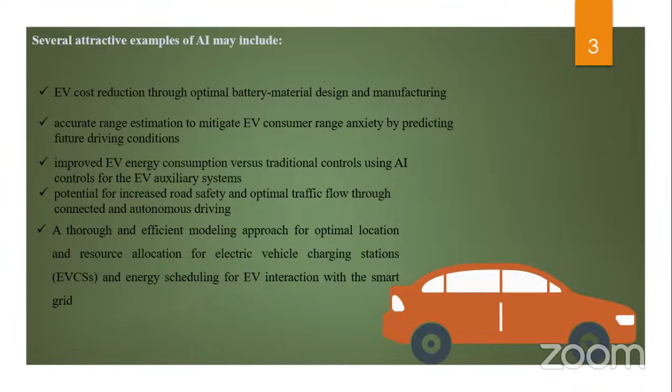Similarly, a thorough and efficient modeling approach for optimal locations of electric vehicle charging stations. These are the limited areas where artificial intelligence has a great contribution: electric vehicle battery design, manufacture, management, range optimization, and EV control system design and optimization.

Now it is not possible that we can skip charging stations when we talk about electric vehicles. It becomes very important to discuss charging station infrastructure, because it is like milk for babies. One cannot survive, one cannot imagine that a baby could survive without feeding milk. Similarly, this electric vehicle industry could never boom unless we have proper infrastructure for charging stations.

So there are several factors related to charging station establishment, like local charging demand, road connectivity and other infrastructures. Other infrastructures could be supply of electricity to that area, construction feasibility - how much the construction is feasible - operating economy, and power grid security.

Being very specific, for optimal location placement, with the help of data analytics including the use of machine learning, better electric vehicle infrastructure could be planned. Secondly, through data collection and data pre-processing, the efficiency of existing electric charging stations could be improved.

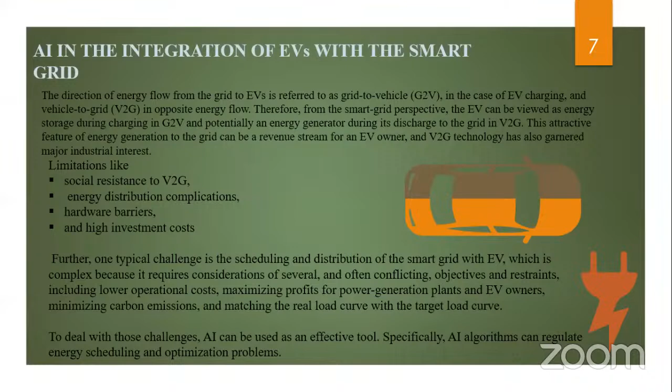But at the same time, there are limitations like social resistance to V2G, energy distribution complications, hardware barriers, and high investment costs. In a nutshell, artificial intelligence can be used as an effective tool, especially AI algorithms that can regulate energy scheduling and optimization problems.

Another trend is the use of artificial intelligence in autonomous driving, that is self-driving cars. AI-based systems give a very convenient driving experience and are also safer, because AI-based vehicles have sensors with the capacity to detect things at the back, front, left, and right of the car, which sometimes becomes impossible for a human driver, resulting in certain road accidents. So these are some research trends available in this industry.

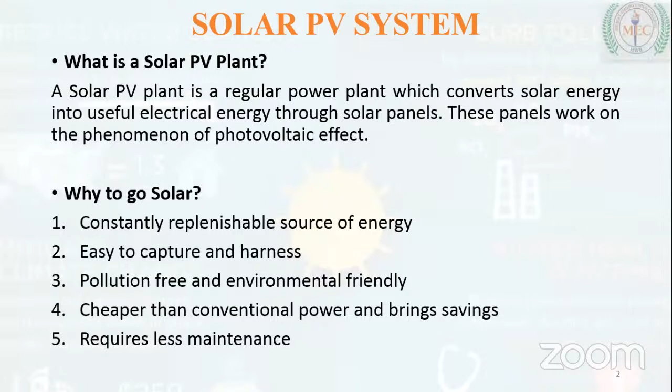Because this source of energy is constantly replenishable, and we can easily capture it. It is also pollution free and maybe the cheapest power that is available today.

Now the electricity that is converted from the solar plant is actually DC power, so we need to convert it to AC by using an inverter. Once the inverter is used, the power gets converted.

So this is a brief scenario of the solar PV plant in India. Currently, India is the third largest nation in terms of consuming electricity, after China and the United States. As the central government has set an ambitious target to achieve net zero by 2070, I believe renewables will play the most important role. The country is continuously targeting to achieve 450 gigawatts of installed renewable capacity, out of which 280 gigawatts is to come from solar.

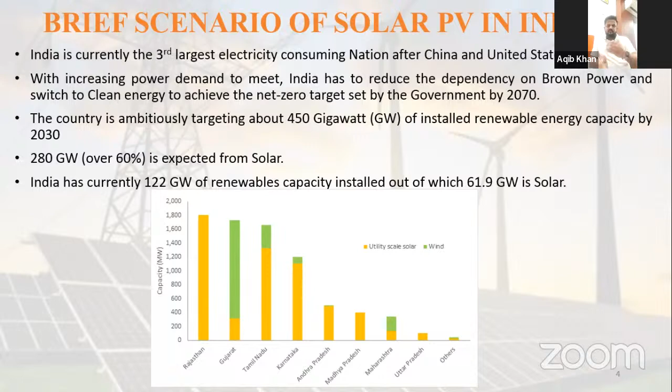So this is a brief overview of what a solar plant comprises of. Basically, a solar plant is not a single component; it is an integration of several components that work together in synchronization to harness the sun's energy. A typical solar system consists of solar panels, mounting structures, solar inverters, battery and charge controller in case of an off-grid system, and a metering panel. The metering panel comes into picture where we install solar in industries, along with cables, accessories, sensors, and a monitoring system.

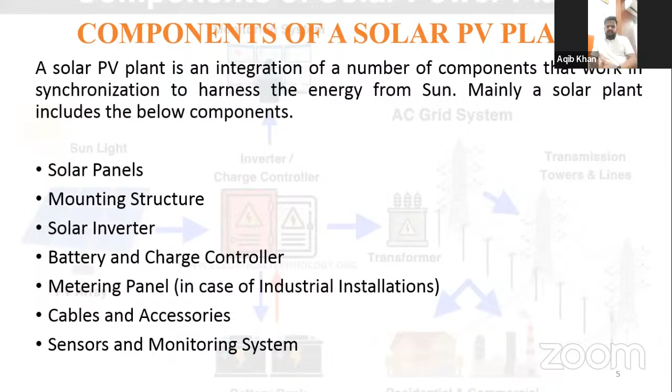This is an overview of the typical characteristics of a solar cell, or solar panel. From this graph we can observe a few important characteristics, which are the operational conditions for solar panels and solar cells. The open circuit voltage can be depicted from there - it is the maximum voltage when there is no load. Short circuit current is the maximum current that can be obtained. Maximum power point, Pmax, can also be obtained from this graph, as can the fill factor and the conversion efficiency. These four points are called the electrical characteristics of a solar panel.

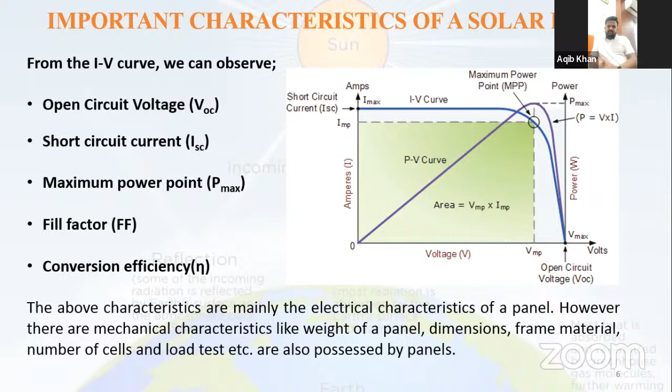Apart from the electrical characteristics, a solar panel or solar cell also consists of mechanical characteristics, like the weight of the panel, dimensions of the panel, and what sort of material is used to harness the cells in the panel. We also did a study of the performance evaluation because it is important to know how the plant is performing.

So there are several factors which are involved in the performance evaluation of a solar plant.

The factors for evaluation include the orientation of the module - meaning at which angle we are placing the solar panel - and the latitude of the location where the plant is installed. Temperature of the cell is another factor. If there are shadow-casting objects nearby, it may block the sun's radiation and affect the generation of the plant. Efficiency of the solar plant is another factor. Solar irradiance is the power density coming from the sun per unit area of the panel. Climatic conditions like clouds, wind, and rain can also affect performance evaluation, along with operation and maintenance, and lastly, the workmanship and installation practice - how you install the plant also impacts the generation.

This is typical data from a plant installed somewhere in Rajasthan. We analyzed the plant for a period of almost two weeks and found this data - the generation we got on 25th January, 26th January, and so on - plotted against the performance ratio. Performance ratio is a very important factor that plays a key role in determining the quality of a solar plant, and you can see the performance ratio is also measured here.

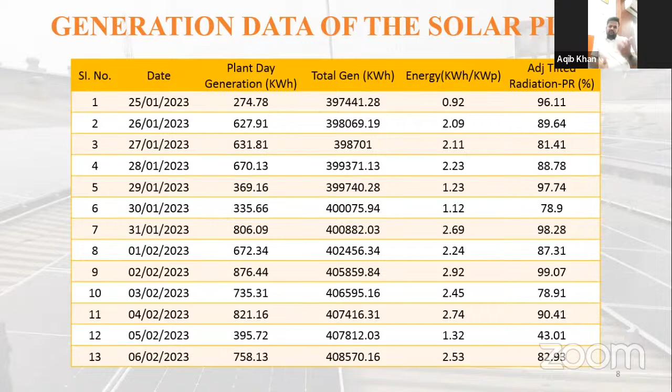All this data is actually measured through a SCADA system - supervisory control and data acquisition system. Wherever solar is installed, a SCADA system is installed so you can monitor the plant data and generation data.

This is the conclusion: this world is facing climate change, and renewable energy is the best alternative, though at the cost of a very high upfront investment. Whenever you need to install solar, you may need to bear a heavy investment. The storage system, battery backup systems, are also quite expensive. A major drawback is that solar panels do not work at night, because once the sun sets, the solar will stop working.

Solar panels cannot be installed on every type of roof. That is another drawback of the system. Additional area is required because solar cannot be installed everywhere. It must be a shadow-free area where you need to install solar.

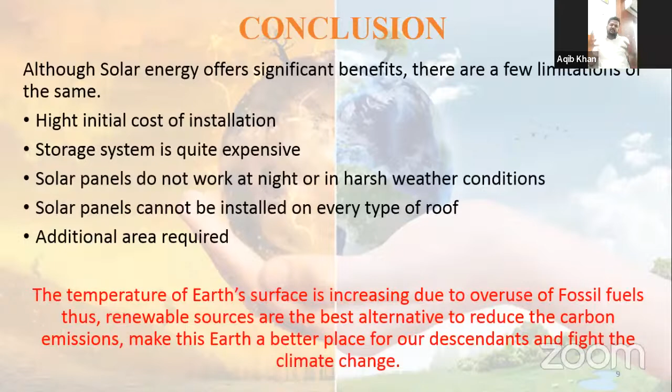The temperature of Earth is constantly rising because of the overuse of fossil fuels, coal and petroleum, so we need to shift our power dependency from brown power to green power. Together we can make this Earth a better place to live, and we can fight climate change. These are the references of a few papers cited during the study. This brings me to the end of the presentation. I would like to invite...

Hello, can you hear my voice? Are you able to hear me? Yes sir, very much audible.

Try to include some data also, some comparison type of data, that would make the paper and presentation more effective. If you have comparison type of data, for example in one year in one city, the automobiles running on diesel or petrol were causing so much pollution. And if electric vehicles are there, then that would show the amount of reduction in carbon footprint. Something like that, if you can include, that would make the presentation more effective. Absolutely sir, thank you for the suggestion.

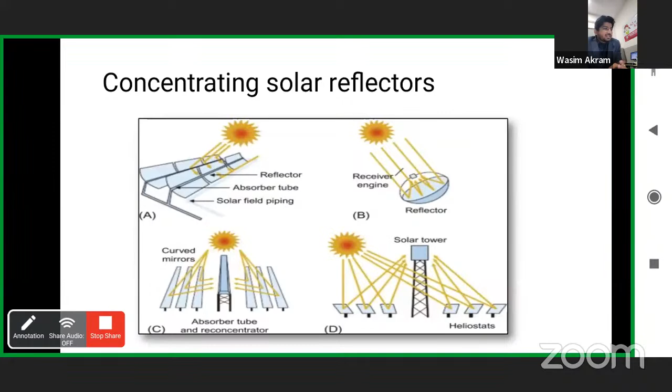The concentrators are typically the most expensive subsystem in a CSP system. Concentrator systems present an alternative target for cost reduction. Additionally, reflector costs make up roughly half of the concentrator's cost, so lowering mirror costs is an ongoing area of research.

Reflectors that are less costly, improved in optical performance, more durable, and have lower maintenance and cleaning requirements are highly desirable and represent key areas of research. A concentrator can be characterized by its concentration ratio and concentrator efficiency.

As far as reflectors are concerned, concentrator efficiency refers to the ratio of sunlight that reaches the receiver divided by the sunlight incident on the concentrator. Real systems have concentrator efficiency values that drop below unity due to imperfect reflector materials and challenges associated with varying solar elevations. The optical properties of the reflectors and the design of the concentrator are both important in achieving high concentration efficiency.

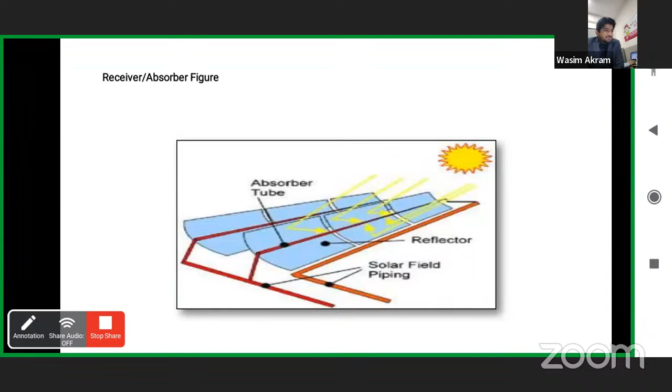I would go to the point of power generation. The generation of electrical power is one of the most important applications of an energy source.

Solar thermal power cycles can be classified as low, medium, and high temperature cycles. Low temperature cycles work at maximum temperatures of about 100 degrees Celsius, medium works at around 400, and high cycles work at a temperature of around 600 degrees Celsius.

Solar energy is one of the valuable sources of renewable energy, and there are different ways to harness it. Low temperature systems use flat plate collectors or solar ponds to collect solar energy, while systems that utilize the solar chimney concept have also been proposed.

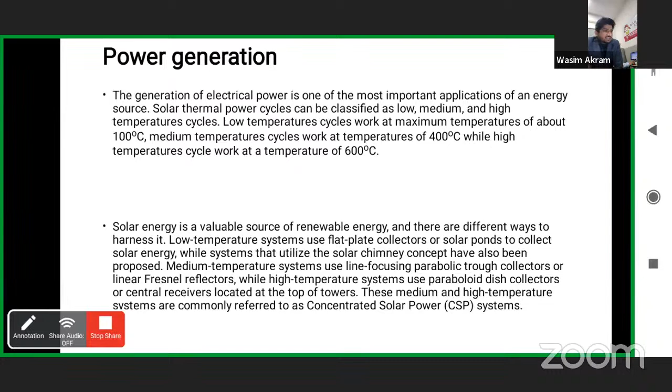Medium temperature systems use line focusing parabolic trough collectors or linear Fresnel reflectors, while high temperature systems use paraboloid dish collectors or central receivers located at the top of the tower. These medium and high temperature systems are commonly referred to as concentrated solar power systems.

As far as the conclusion is concerned, I would like to go to that point. Concentrated solar power stands out as one of the very unique forms of renewable energy, thanks to its ability to store thermal energy. This allows it to produce electricity on demand, acting as a reliable and consistent source of power similar to traditional baseload power plants.

Additionally, the integration of CSP with thermal energy storage allows for greater utilization of other variable or intermittent renewable energy sources such as wind and solar power collectors. It can also work in conjunction with fossil fuels in hybrid configurations, improving the overall performance of both systems.

Researchers and scientists have spent over a decade exploring ways to harness the vast energy potential of the sun, and the CSP industry continues to innovate and improve its grid compatibility, use in hybrid systems, and integration with...

As far as this is concerned, it increases the efficiency, because we all know that solar energy is almost provided free of cost. So it is one of the very promising technologies, and the future

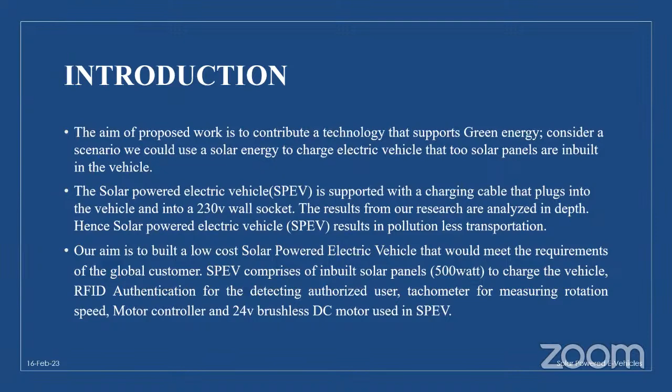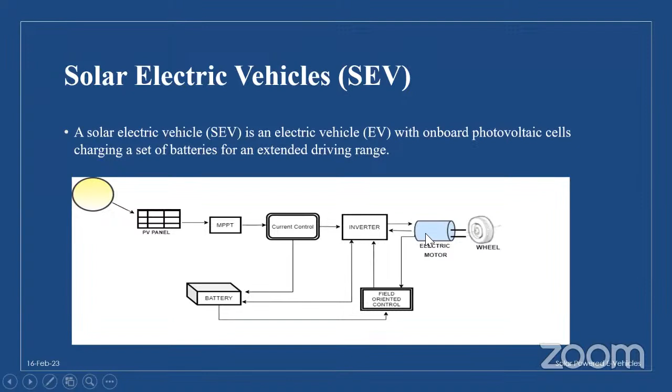A solar power electric vehicle is supported with a charging cable that plugs into the vehicle and into the 230-volt wall socket. My research topic is about a solar electric vehicle, which is a very pollution-less transportation system. This is my solar electric vehicle figure. This is the PV panel and MPPT, which is maximum power point tracking, current control, and inverter. This is the electric motor, and we are also using a battery. I'm not going to talk about the theory of the solar electric vehicle; I'm talking about all my calculations in my research paper. My calculation is about the solar electric vehicle. I have only taken the assumption of data like mass and speed of the electric vehicle. Mass of the vehicle is 130 kg, speed is 40 km/h, the slope is 0.1, and diameter is 0.58. Battery weight is approximately 30 kg, average speed is about 35 km/h, and the range is 50 km.

Calculation about the angular velocity of the wheel, I have shown in the figure also. And this is the calculation about linear velocity, 40 km/h, and the speed I have taken is 40 km/h, which in meters per second is 5 upon 18. Diameter of the wheel is 0.58 meter, and the radius is 0.29. And the angular velocity, using linear velocity equals angular velocity into radius, this is the calculation about angular velocity, and the relation about angular speed also.

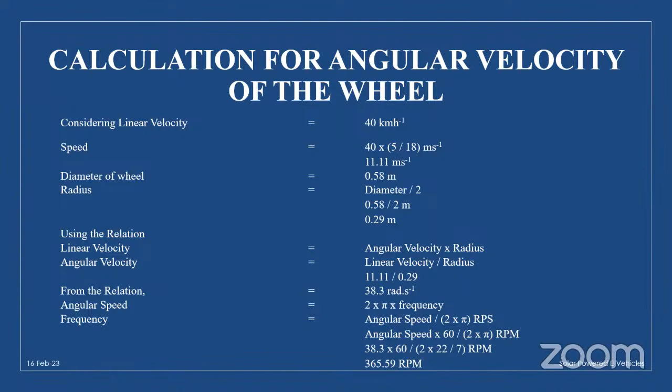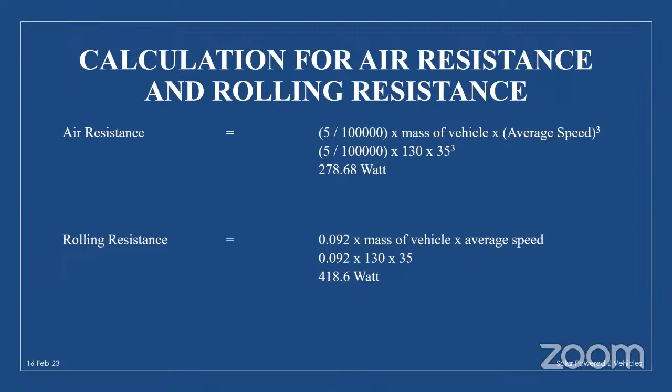So the power required is torque into angular velocity, I am calculating this. This is the air resistance calculation and the rolling resistance calculation. Calculation for the continuous power required, speed and torque required, I have calculated there. Power required is air resistance plus rolling resistance, and continuous speed is average speed into 60 divided by 2 pi radius of the wheel, and torque required is air resistance plus rolling resistance into 60 by 2 pi continuous speed.

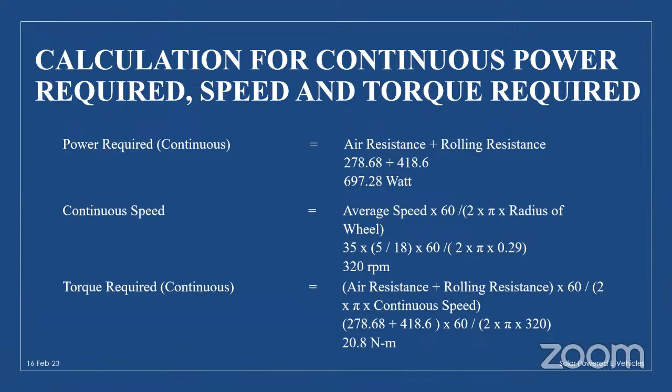This is my final calculation result: angular velocity is 38.3 radians per second, and frequency is 365.59 RPM, peak torque is 45.47 Nm, and power required is 1741.5 watt. Air resistance is 278.68 watt, and rolling resistance is 418.6 watt, and power required is 697.28 watt, and continuous speed is 320 RPM, and torque required is 20.8 Nm.

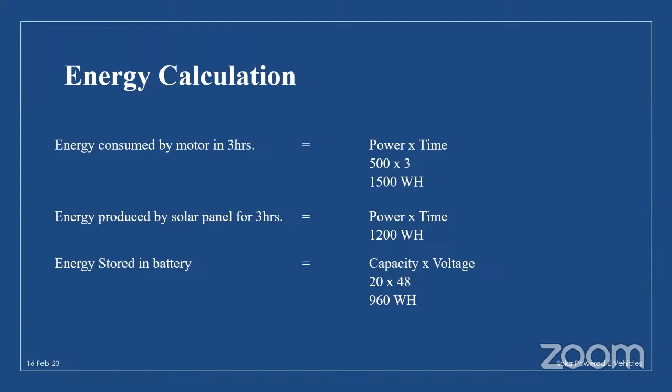And the solar electric vehicle has many advantages, and also disadvantages, that it cannot travel in the rainy season, it cannot be used because of no sunlight, but we can also use super batteries for solar electric vehicles. It is also a pollution-less transportation system, and it is very helpful for our health. Thank you.

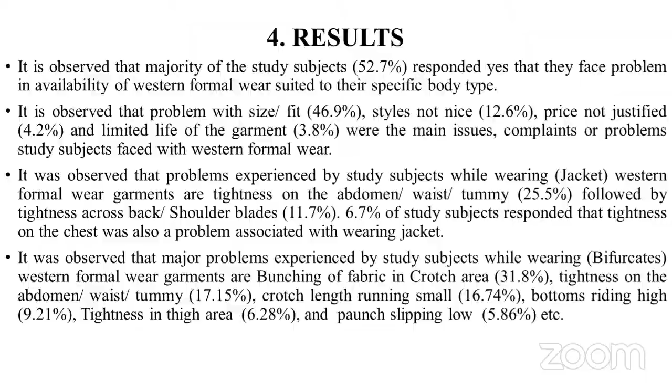In conclusion, the study results indicate that the biggest problem with clothing is size and fit. Specifically, the biggest problems with jackets are tightness on the abdomen, waist, tummy, followed by tightness across the back, shoulder blade, and chest. On the other hand, the biggest problems with trousers were crotch length, running small, bunching of fabric in the crotch area, and tightness in various areas such as the abdomen, hip, and thigh.

The participants were willing to pay an extra 10 to 15% above the price they usually pay if this problem were resolved. The study highlights the importance of ensuring proper size and fit when designing and producing clothing.

Further studies could address the limitations identified in this study, and a larger sample size could be collected to increase generality of the findings. Moreover, the study could be conducted in different regions to see if the findings hold true for other areas. These are the references. Thank you.

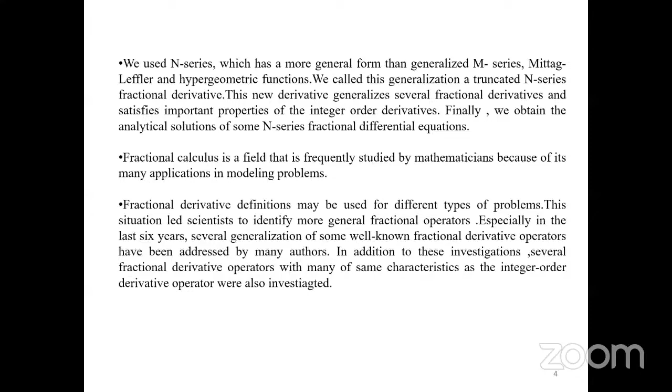Especially in the last six years, several generalizations of well-known fractional derivative operators have been addressed by many authors. In addition, several fractional derivative operators with many of the same characteristics as the integer order derivative operator were also investigated. So I'm starting with the definition of the fractional derivative, given by equation 5.1.1.

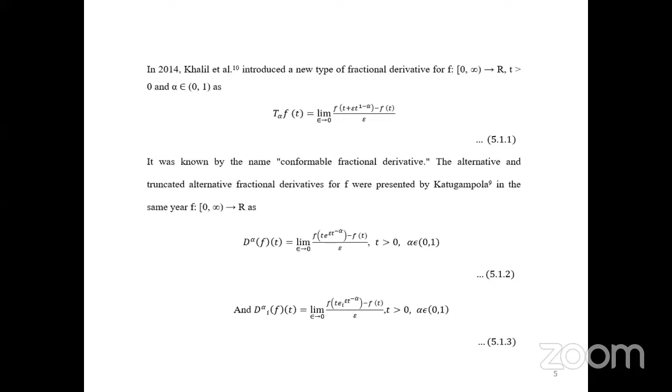It was known by the name conformable fractional derivative. The alternative and truncated alternative fractional derivative for f was presented by Katugampola in the same year. These definitions are represented by equations 5.1.2 and 5.1.3.

Here we have given the exponential function, ex, which is the truncated exponential function. Recently, Sousa and de Oliveira introduced the M fractional and truncated M fractional derivatives, which we have defined by equations 5.1.4 and 5.1.5, using the one-parameter Mittag-Leffler function and its truncated version.

All of the derivatives presented above satisfy certain properties of classical calculus, such as linearity, product rule, quotient rule, chain rule, and the rule of function composition. Besides, for all the operators given above, the alpha order derivative of a function is a multiple of t raised to the power of 1 minus alpha.

By giving various values, this function is reduced to modified M series. If we put theta as 1, then the function converts into modified M series, where beta, gamma, theta, delta, and z belong to complex numbers, and the real part of beta should be greater than 0.

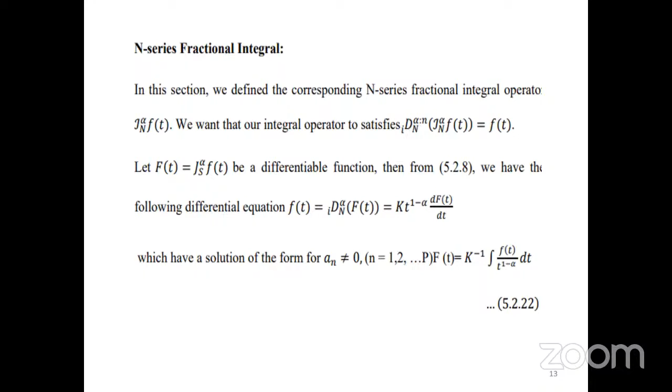Next we have introduced the n series fractional integral. Its definition is represented by equation 5.2.22.

Then the next definition is: let alpha, a greater than or equals to 0, and t greater than a, and f defined in the semi-closed interval. If the following improper Riemann integral exists, then...

Conclude it. Okay sir, I'm concluding.

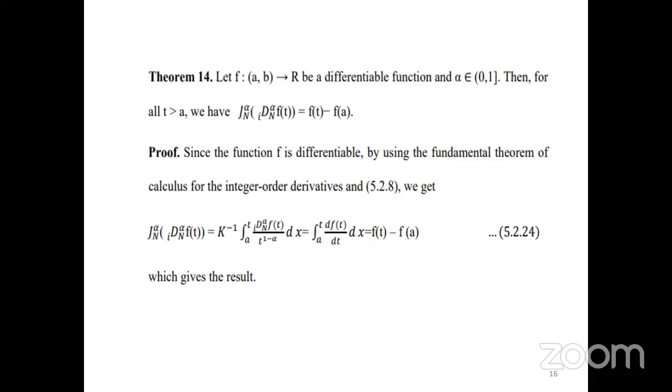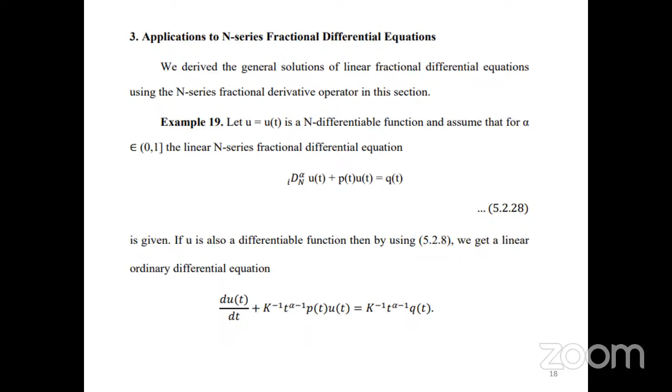These are the various theorems which we have proved, taken from the classical approach, and we have applied the n series. Then, application of the n series to fractional differential equations - we have taken this linear fractional differential equation and found its solution. Ultimately, this is the solution given by equation 5.2.30.

The conclusion is that we can say the truncated n series fractional derivative operator can be used instead of Riemann-Liouville or Caputo type derivatives to solve some difficult problems. So our definition is also a generalization of the m fractional derivative for p and q equals to 1.

Other special functions can be used instead of the n series to define additional fractional derivatives, because the n series is a general class of special functions and a generalization of the Mittag-Leffler function. All future definitions may be a special case of our definition. So thank you sir, this is all about my paper.

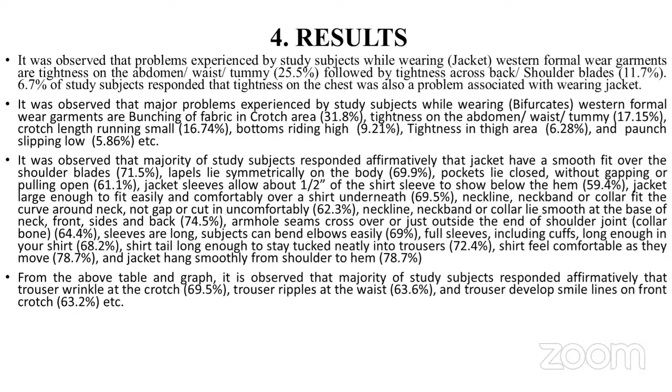Conclusion: the developed measuring method and pattern alteration system throughout this research may be crucial in the creation of theory on clothing sizing and body shape, as well as engagement of organizations responsible for clothing manufacturing and modification. It is predicted that the findings of this study will provide a considerable amount of data that may be used in the formulation and development of numerous ideas on body types, production methods, and alteration.

The pattern modification and customized pattern system created have been proven to be a foolproof and cost-effective solution to body shape, posture, and other variables, which was the primary problem area that this research set out to answer.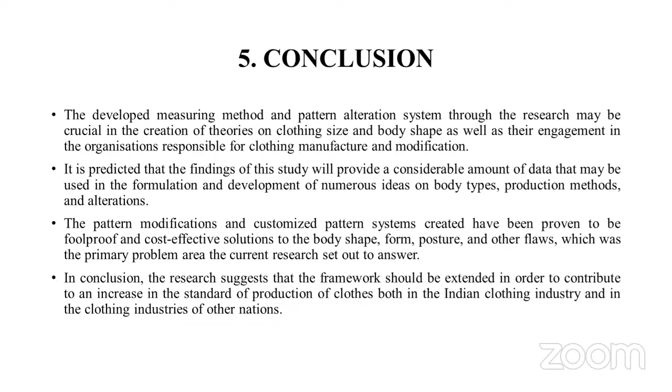In conclusion, the research suggests a framework should be extended in order to contribute to increasing the standard of production of cloth in the Indian clothing industry and in the clothing industries of other nations. There are references. Thank you.

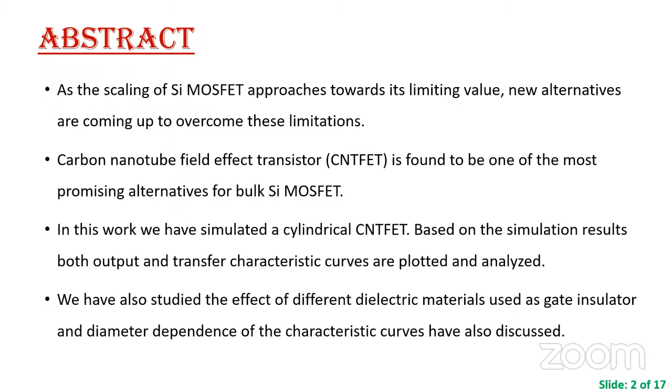Good afternoon everyone, welcome to my presentation. First of all, let me thank you all for giving me this opportunity. My topic is Cylindrical CNT FET. As scaling of Si MOSFET approaches its limiting value, new alternatives are coming up to overcome these limitations. One of the most promising alternatives for bulk Si MOSFET is the Carbon Nanotube Field Effect Transistor, or CNT FET. In this work we simulate a cylindrical CNT FET; based on the simulation results, both output and transfer characteristics are plotted and analyzed. We also study the effect of different dielectric materials used as the gate insulator, and the diameter dependency of the characteristic curve is also discussed.

So what is a carbon nanotube, or CNT? Carbon nanotubes are basically a graphene sheet rolled up in a certain direction. Cylindrical CNTs are made up of carbon graphene, and their chirality describes how the graphene sheet is rolled up to form the CNT. A CNT might be metallic or semiconducting depending on its chirality.

Introduction to CNT FET: a CNT FET is a field effect transistor that utilizes a single carbon nanotube or an array of carbon nanotubes as a channel material. These are formed by connecting two metal electrodes, with the gate electrode separated from the CNT channel by a thin oxide film. There is no scattering in the CNT channel because it works on ballistic transport.

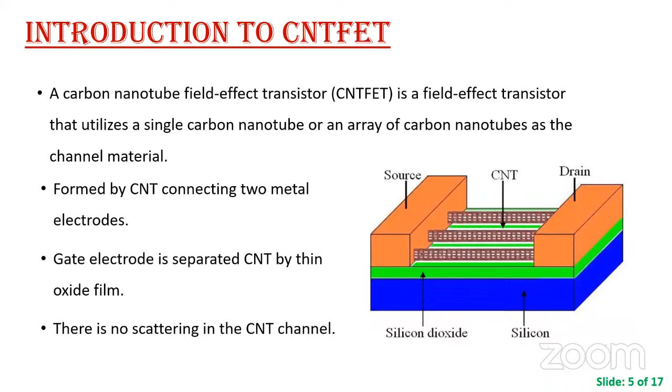Why do we use carbon nanotubes? Because single-wall carbon nanotube is a potential channel material for high performance logic circuits, and its mobility is around 3000 to 10,000 centimeter squared per volt-second. The confinement of charge inside the nanotube allows ideal control of electrostatics, giving good gate control.

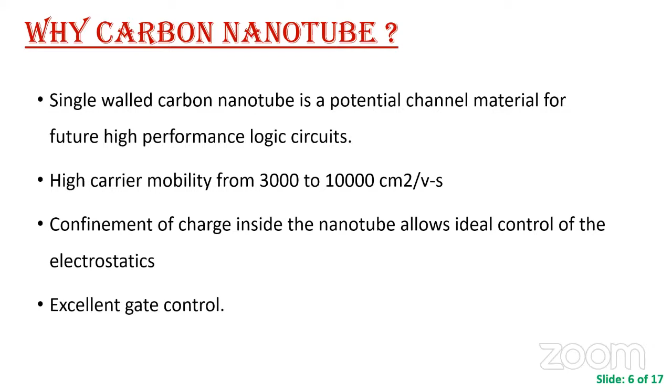The cylindrical CNT FET is basically the CNT FET that uses a channel surrounded by an oxide layer, which is surrounded by a metal contact, and the metal contact serves as the gate terminal.

There are different advantages of CNT FET, including low power consumption. It consumes very less power as compared to bulk MOSFET, and its mobility is also very high with very less threshold voltage. It also has better control over channel formation, there is no direct tunneling, and the gate leakage current is also very less.

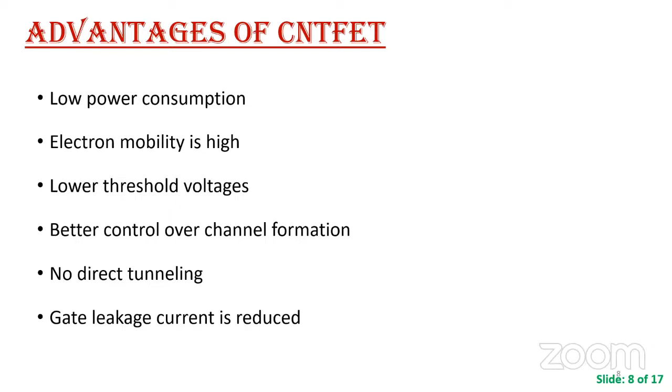We simulated this using the NanoHub tool. In this simulation we consider the diameter of the nanotube as 1 nanometer and the gate insulator thickness as 1.5 nanometer, and the threshold voltage is 0.2 volt. The dielectric constant for the gate oxide is 3.9, that of SiO2. For plotting the characteristics, we have taken different drain currents for different gate voltages and drain voltages.

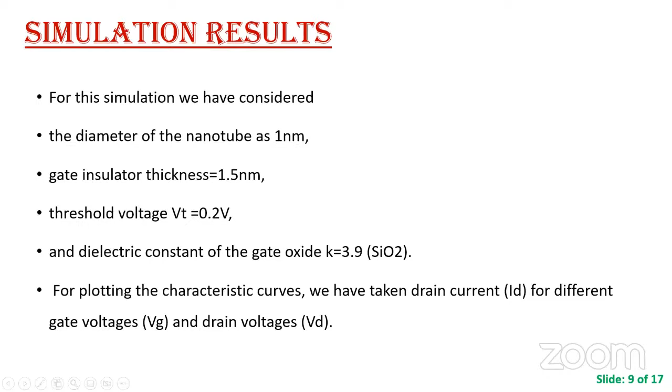From figure (a), we can see that the plot is between drain current and drain voltage, similar to the MOSFET, in which we have different gate voltages from 0.25 to 1.5 volts.

We can also plot the graph between saturation drain current and Vg minus Vt, which is linear. It shows that the spacing between two consecutive curves is almost the same, which means that the saturation current shows a linear dependency with Vg minus Vt.

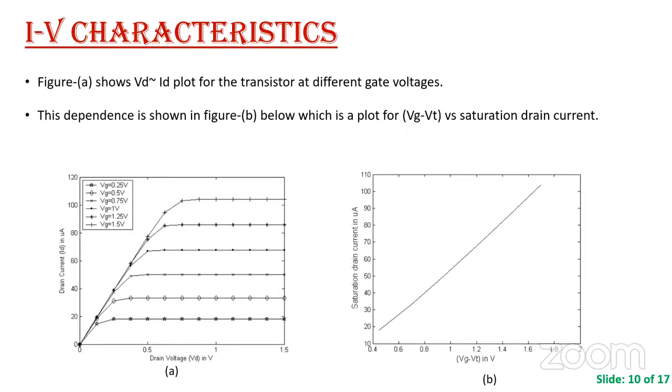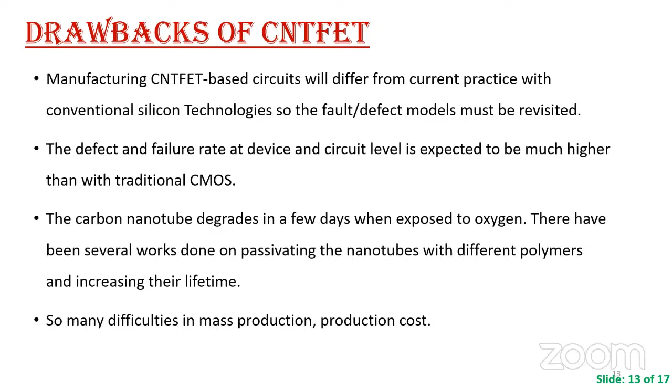There is some comparison between CNT FET and MOSFET. In the case of CNT FET, switching occurs by modulation of contact resistance, as compared to silicon MOSFET, where switching occurs by altering the channel resistivity. CNT FET has about 4 times higher transconductance compared to MOSFET, and CNT FET is capable of delivering 3 to 4 times higher drive current than the bulk MOSFET.

The average carrier velocity in CNT FET is almost double that of MOSFET. The on-current performance advantage of CNT FET is either due to high gate capacitance or due to improved channel transport. The improved channel velocity for CNT FET is due to the increased mobility and band structure of CNT FET, and it is a result of 1D ballistic transport of holes and electrons.

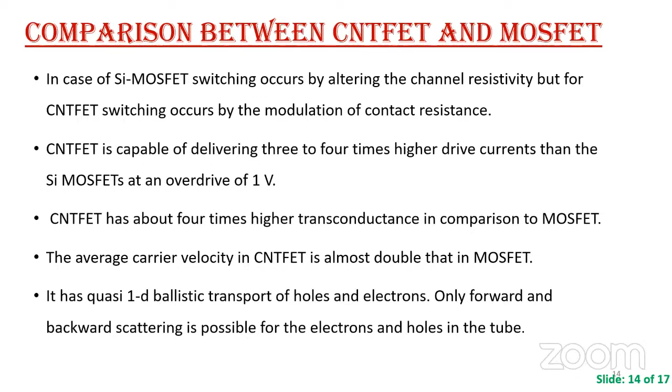So only forward and backward scattering is possible for holes and electrons in the tube. But the mean free path is of the order of 1 micrometer, implying that the carbon nanotube has ballistic transport capability.

In conclusion, we have presented some simulation results for cylindrical CNT FET, and we conclude that the saturation current shows a linear dependency with Vg minus Vt, that is, overdrive voltage. We also discussed the diameter dependency of the characteristic curve, which shows that drain current is more for higher values of diameter, and the difference decreases as we go from higher values of diameter.

Finally, we discussed the effect of using high dielectric material as gate insulator, which shows that the saturation current increases with increasing K, but at a decreasing rate. These findings are very helpful for further exploration of CNT FETs.

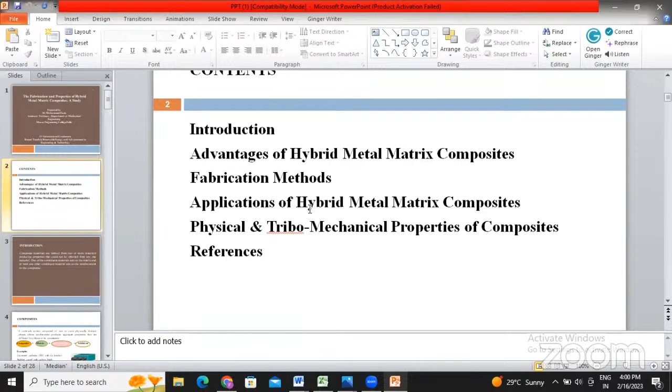Faris sir, please run the slideshow. Okay sir, my slide, we are coming to the second slide: introduction, advantage of hybrid metal matrix composites, fabrication methods, applications of hybrid metal. So basically composites are materials made from one or two or more materials, producing a third material which has sustainable and good properties as compared to a single material.

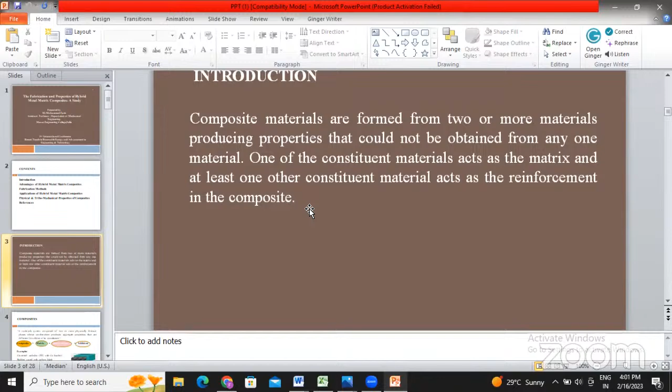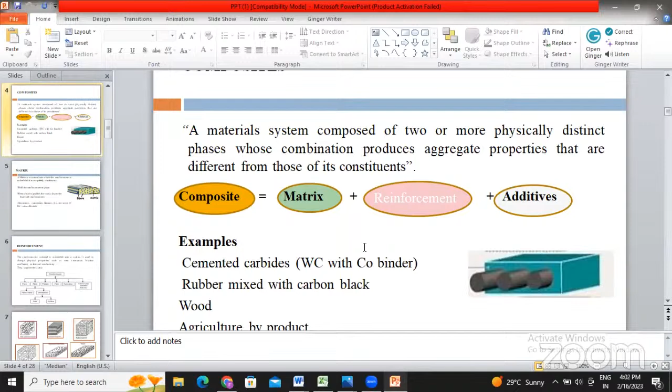Now what does the composite consist of? A composite material is made up basically of two things: first the matrix and second the reinforcement. The matrix is the base metal and the reinforcement is the secondary material. A third component is the additive, which sometimes acts as a lubrication or is used to avoid cold welding. The matrix is the base material, and the reinforcement is added into the matrix according to the requirement of the properties of the material. The reinforcement may be cemented carbides, rubber mix, carbon blacks, wood, and agriculture byproducts. And the third one is our additives.

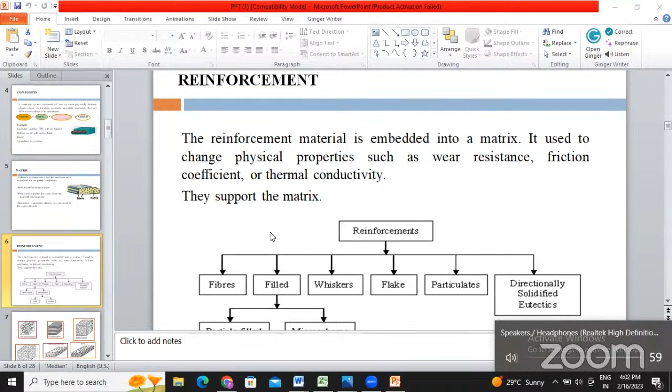The matrix is the material into which reinforcement is added; we have covered that. Next is the reinforcement, which today is the key material embedded into the matrix, deciding the properties and qualities of the material used for further machining process or according to requirement.

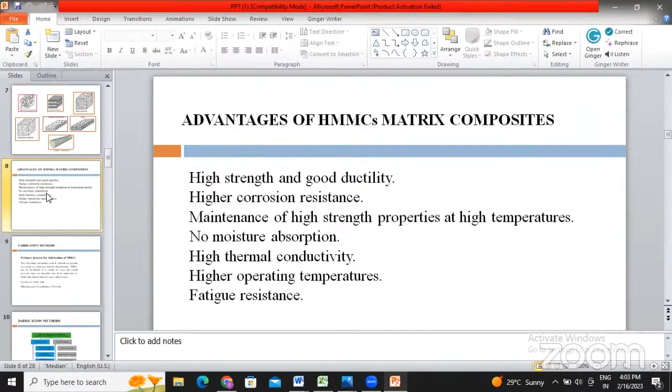Next, the advantages of hybrid metal matrix composites: high strength, good ductility, higher corrosion resistance, maintenance of high strength properties at high temperatures, no moisture absorption, high thermal conductivity, higher operating temperatures, and fatigue resistance. These properties represent the basic needs for the requirement of composite materials.

Next is the fabrication methods, how we develop them. Basically there are 3 or 4 methods for fabrication of hybrid metal matrix composites. The first is powder metallurgy, in which we take the material in powder form, and with the help of a die and compressive press, we make it into a solid pellet. That pellet is then sintered, and after that it goes through mechanical testing.

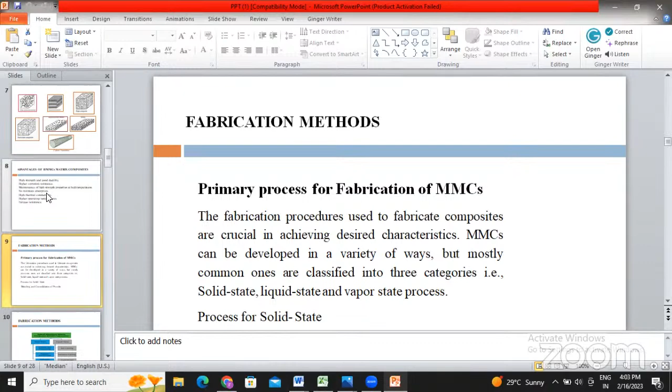The next topic is fabrication methods, discussed for solid and liquid states. In the solid state, we basically use powder metallurgy, as already discussed. In the liquid state, we use the stir casting method: we melt the material at its melting temperature, add the reinforcement, and stir. After that, we pour it into a die and solidify. After solidification, it goes through mechanical testing.

That is our die for the powder metallurgy route. That is the upper punch, that is the lower punch, and that is the ejector. We fill the powder into the die after placing the lower punch inside it. Then we apply hydraulic pressure on the die, and the powder forms into a compact. That compact further goes for the sintering process, and after sintering it proceeds to mechanical testing. That is the basic process for the powder metallurgy route.

If you want to develop a composite through powder metallurgy, then we use this type of die.

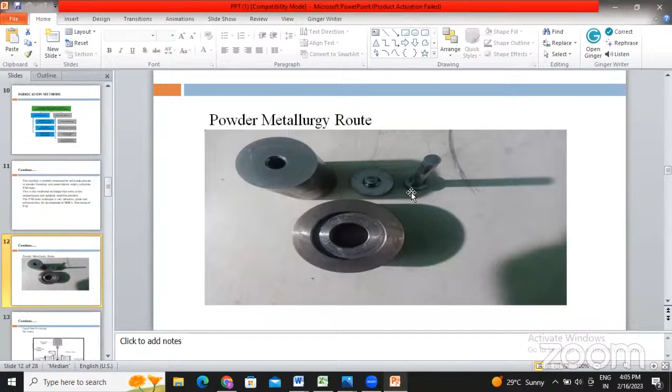The next one is liquid state processing, that is stir casting. That is a bowl, used for stirring. We put in the powder and apply heat. With the help of that heat, the powder melts into a liquid state, and that liquid is stirred. After stirring, by setting the parameters, it is poured into a die and solidified. After solidification, it goes through testing.

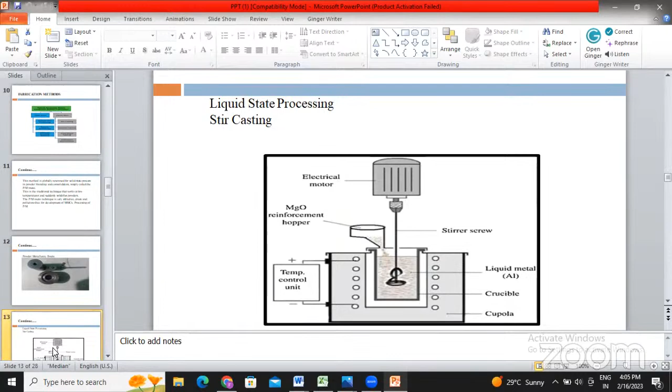The next one is the pressure die infiltration process, in which we use a pressure infiltration method for fabrication of metal matrix composites using die casting technology. The preform is placed into the die. After that, molten metal is filled into the die and permitted to cool inside it. It is the lowest cost process, and the basic pressure die infiltration process is shown in the figure.

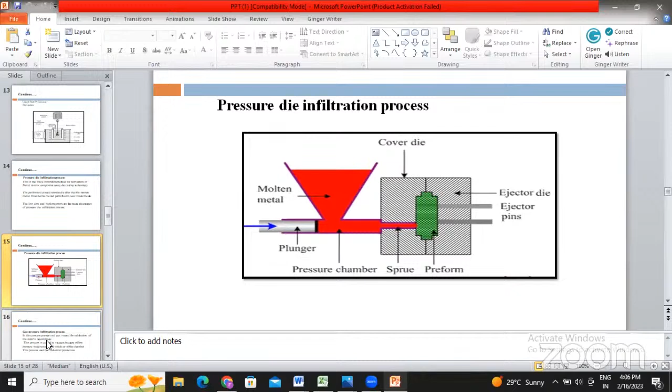Suppose that is our molten metal here, shown in red, and inside the die we apply pressure with the help of a plunger or a particular hydraulic press arrangement, and that fills into the die. It is covered and allowed to solidify, and after solidification it is removed. This type of process is low cost and easy to fabricate.

Gas pressure infiltration process: with the help of gas pressure, we can also develop composites or a pellet, and this type of arrangement is used here. Our molten metal is here, and the preform is here. After that, the metal matrix composite is developed by pressing with gas. But the gas should be a neutralized (inert) gas.

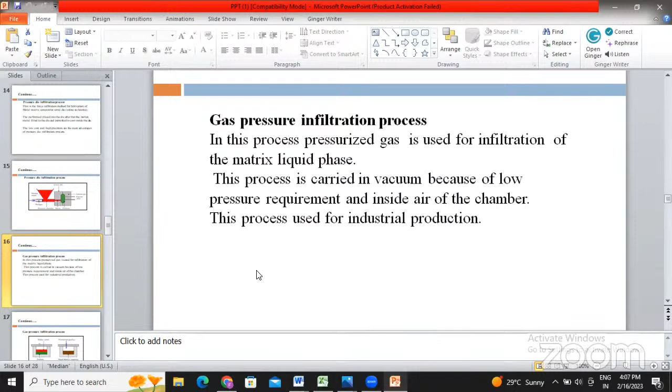Next is the gas pressure infiltration process. In this process, pressurized gas is used for infiltration of the metal matrix liquid phase. This process is carried out in vacuum because of the low pressure requirement inside the chamber. For industrial production of composites, we can easily use this gas pressure infiltration process.

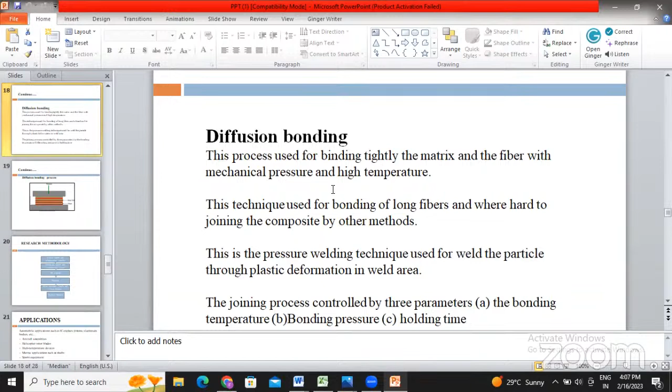Next is diffusion bonding. This process is used for tightly binding the matrix and the fiber using mechanical pressure and high temperature. This technique is used for bonding long fibers where joining of the composite by other methods is hard. If you require high quality joining, that depends on the bonding temperature, bonding pressure, and holding time. This is basically a pressure-type development of composites.

To see the methodology for developing composites in a simple way: first, collect the matrix and reinforcement material. Two things are collected: matrix and reinforcement material. Then we mix and blend it according to set parameters. Then we proceed with stir casting, if possible, or the powder metallurgy route. Here we take stir casting. After that, sintering, and then microstructural, tensile, and wear studies, followed by studying the finished product.

Next is the applications of composites. Worldwide demand for composites is increasing 5% per year, and after World War II, demand has been increasing day by day. Aircraft assemblies and the automobile sector are the biggest consumers of composites in our country. Applications include IC engine pistons, aluminum bodies, helicopter rotor blades, high temperature devices, marine applications, sports equipment, and electronic equipment. These are the applications where composites are used right now.

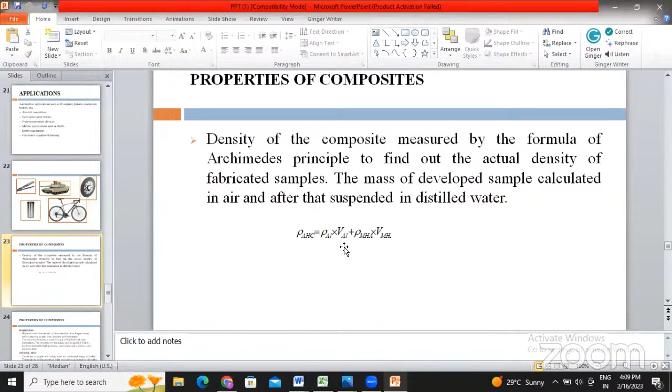Now let's look at the properties of the material. It comes from density properties. Density is the first physical property, which is calculated by that formula.

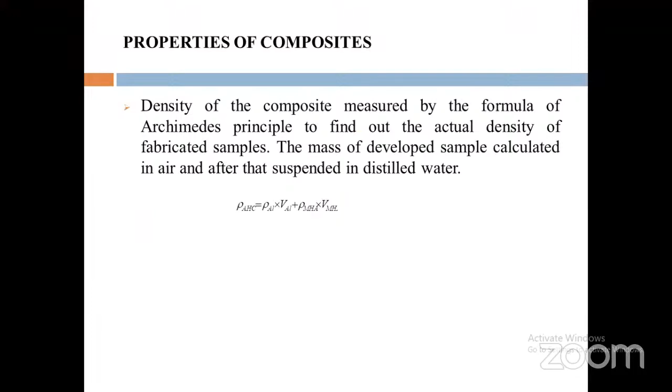Hardness and tensile: as we know, hardness is the characteristic of the material to resist permanent deformation. Micro hardness tests are also performed at a 1 kg load with static indentations, following the standard testing procedures for hardness.

Tensile strength is also very important to decide the composites according to the applications required for industry or any other use.

Next is the compressive strength. This is a very important factor for compressive testing, and we use the American standards for this.

And fatigue life, in particular from continuous loading, prolonged loading of the composites. We have also used fatigue testing of the composites.

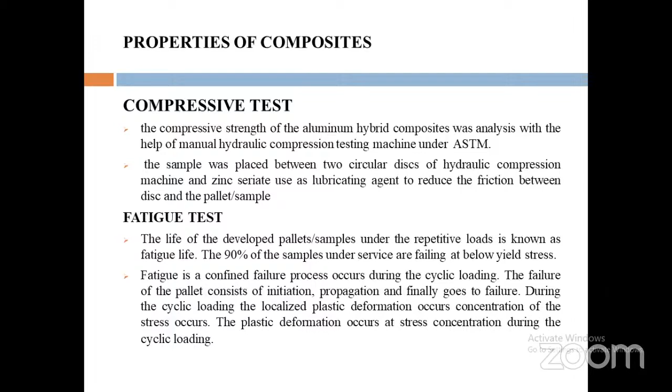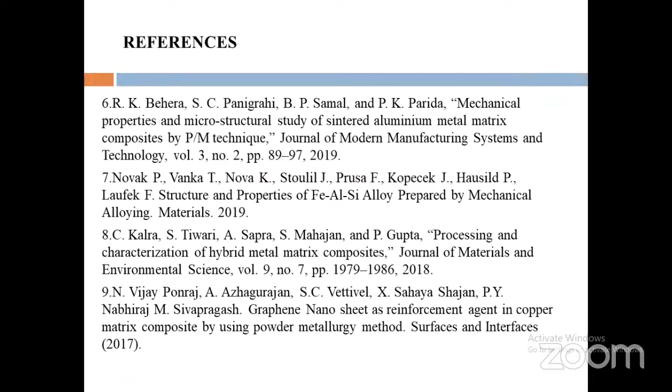Next are the references. Thank you. That is all about the composites and its material.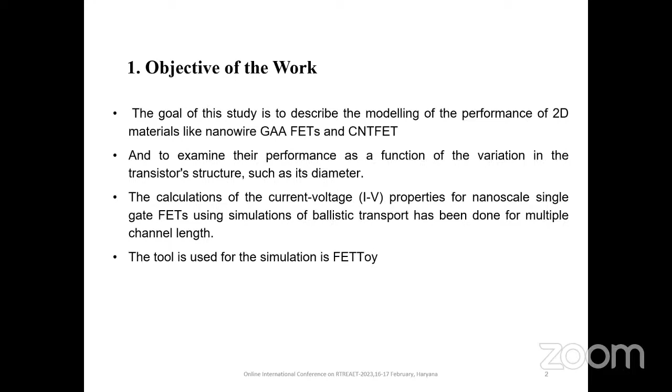For that reason, a large number of novel device structures have been proposed in the literature, like 3D MOSFETs, Schottky barrier MOSFETs, FinFETs, gate all-around silicon nanowire transistors, and CNT FETs.

So the nanowire could be a better prominent structure in the field of MOSFETs. We try to simulate the nanowire field effect transistor along with its diametric parametric variations, and we also have another type of transistor, which is the carbon nanotube field effect transistor.

These types of MOSFETs can be built by rolling graphene sheets, and the vector along which the sheets are rolled is known as the chiral vector. The physical structure of CNT FETs is very similar to MOSFETs, which makes them suitable for use in the foundries we currently use. A semiconductor carbon nanotube is inserted between the source and drain as a channel, so the functionality of a MOSFET can be achieved with this structure.

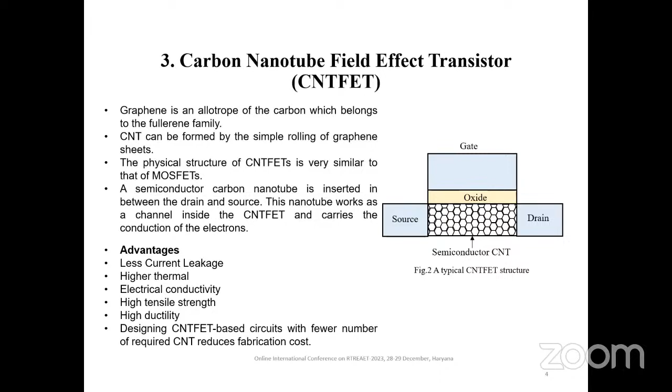Designing CNT FET based circuits requires fewer components, and CNT FET reduces the fabrication cost of electronics and digital circuits.

In this simulation, we used our nanohub FETToy tools. We initialized it and varied different physical dimensions, used the electron mass value of 2D material model parameters to get drain control, and then changed environmental parameters like initial and final voltage, extracting IV analysis for the designed nanowire FET and CNT FET.

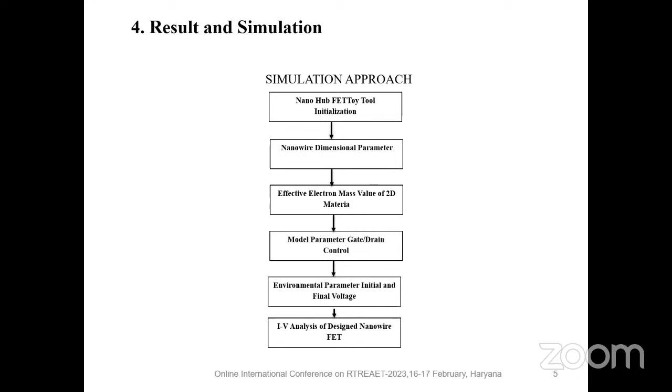So what we have done is the simulation for these types of devices. The first one is CNT FET, and the second one is silicon nanowire. Both look very similar, but the major difference between them is the materials.

In the CNT FET, the channel used is made of carbon, and in the silicon nanowire, the channel is made of silicon. In the simulation results, we extracted many graphs at different values and parameters, and stabilized them.

All the graphs have been depicted in these pictures. The graph shows the drain current or ID characteristics of the MOSFETs at different channel lengths and different biasing points. The first graph is shown for 1 volt, and all biasing conditions are same for all types of devices, whether CNT FET or nanowire MOSFET.

The first 3 graphs are shown for the carbon nanotube FET, and the last 3 graphs are shown for the nanowire MOSFET. From these graphs, we can conclude that our CNT FET is showing better results.

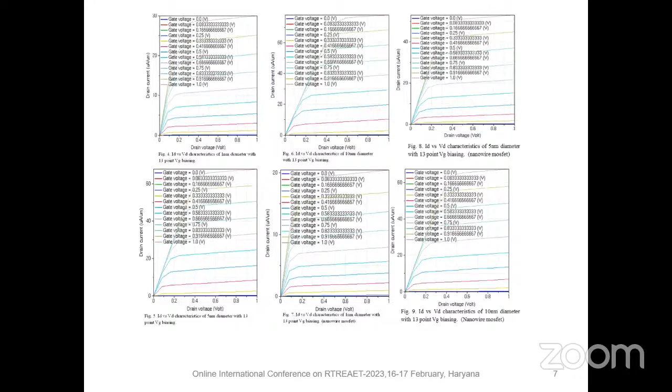In conclusion, in this research work we simulated both CNT nanowire and gate-all-around FET, using the FETToy tool for multiple channel lengths. We observed that the CNT FET proves to be a better candidate at the sub-10 nanometer node, because the drain current is directly proportional to the performance of the devices.

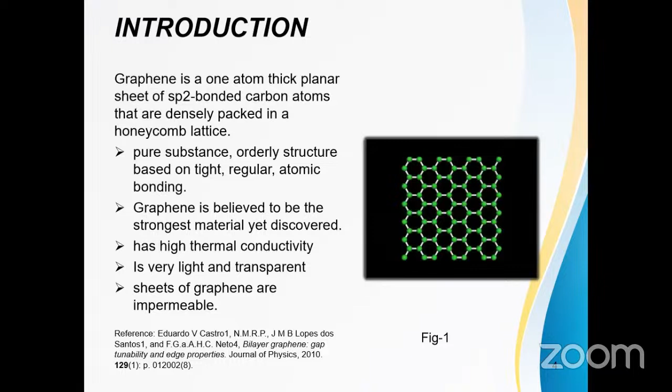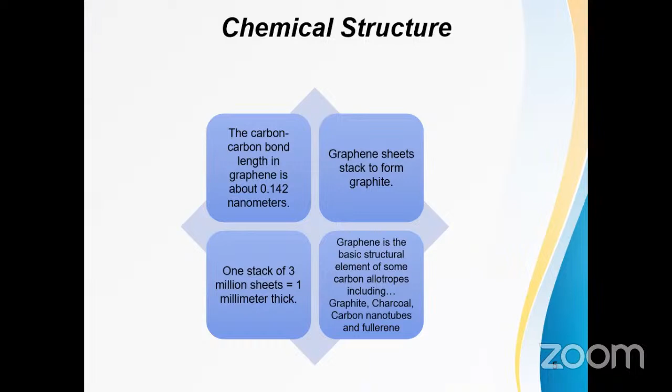Graphene is a one-atom thick planar sheet of sp2 bonded carbon atoms densely packed in a honeycomb lattice. Graphene possesses a unique combination of properties that has attracted attention for electronic applications. It is patternable, scalable, and has demonstrated high mobility and even room temperature ballistic transport. It has a pure substance, orderly structure based on tight, regular atomic bonding. Yet graphene is believed to be the strongest material. It has high thermal conductivity and is very light and transparent. Graphene sheets are almost impermeable. The carbon-carbon bond length in graphene is about 0.142 nanometers. Graphene sheets stack to form graphite; one stack consists of 3 million sheets and is about 1 millimeter thick. Graphene is the basic structural element of some carbon allotropes, including graphite, charcoal, carbon nanotubes, and fullerene.

Various properties of graphene nanoribbons: it is a ribbon form of graphene and inherits almost all the attractive properties of carbon nanotube and graphene, like high mobility, high electrical and thermal conductivity. It has an additional benefit of a tunable band gap, meaning its band gap can be adjusted by applying external voltage, giving tunable semiconducting behavior with changing ribbon width. The first band gap measurements were made by Feng Wang and Philip Kim. Wang gave the theory of high on-off current ratio and large transport band gap at room temperature, and according to Philip Kim, energy gap scales inversely with ribbon width.

We worked on the energy gap of the graphene nanoribbons and how it can be tuned. The energy gap of one-dimensional graphene nanoribbons can be produced lithographically by patterning two-dimensional graphene through a chemical route. When graphene is patterned into a nanoribbon and carriers are confined to a quasi one-dimensional system, we expect the opening of an energy gap.

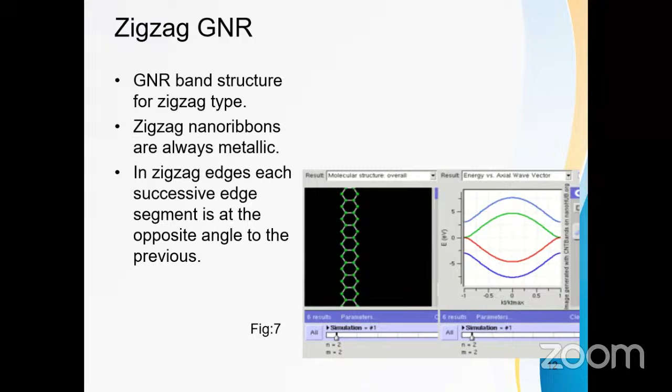Here are the various synthesis methods of GNRs. The structure and physical properties of GNRs vary significantly depending on the synthesis method. These methods include cutting from graphene using lithography. The lithography process involves nanolithographic techniques through which transistors with smaller features can be patterned, using X-rays to transfer a geometric pattern from a mask to a light-sensitive chemical photoresist.

The second method is bottom-up synthesis, in which structures are assembled from their subcomponents in an additive fashion. The third method is unzipping of carbon nanotubes.

GNRs can be produced by unzipping or axially cutting nanotubes. In one such method, multi-wall carbon nanotubes were unzipped in solution by the action of potassium permanganate and sulfuric acid. In another method, GNRs were produced by plasma etching of nanotubes partly embedded in a polymer film.

GNRs are commonly used in the following applications. Since graphene nanoribbons possess semiconducting properties, they may be a technological alternative to silicon semiconductors, capable of sustaining microprocessor clock speeds in the vicinity of 1 THz.

So it can be used in various types of field effect transistors or diodes, like field effect transistors, Schottky diodes, PN junctions, light emitting diodes, solar cell systems, liquid crystals, and transparent conductive electrodes.

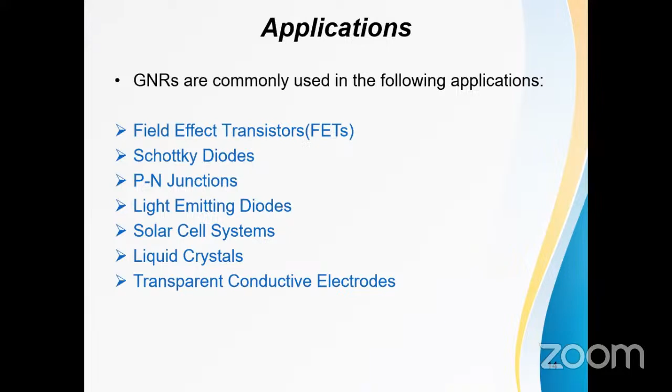The mechanical properties of the two most common graphene nanoribbons, zigzag and armchair, were investigated by computational modeling using density functional theory, molecular dynamics, and the finite element method.

Here are the various advantages of graphene nanoribbons over other semiconducting materials like silicon. Graphene nanoribbons have many properties that make them ideal for electronic devices, like superior electrical conductivity and high charge carrier mobility.

You please conclude your paper and share your work.

Yes, sir. The mobility of graphene nanoribbons is almost 250 times higher than silicon, as we see by the simulation method, and its flexibility and thinness are also much greater than silicon.

Through our research work, we see that GNRs are promising future models for future electronics due to their unique properties. And if we do the fine tuning of the electronic band of GNR, it will definitely increase its future potential applications.

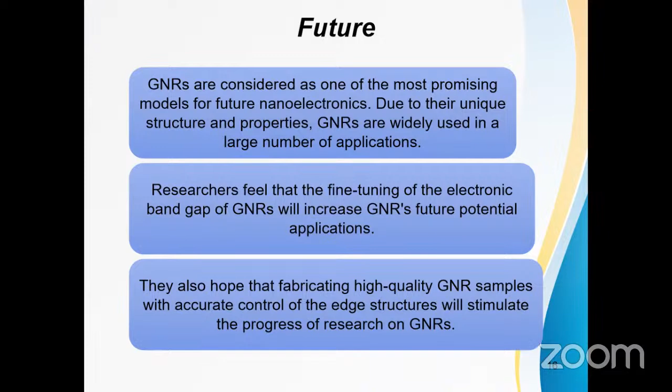Silicon synthesis is top-down, according to which there is a limit to how far we can etch, lithograph, and pattern a silicon material. But we synthesize graphene nanoribbons by bottom-up fabrication, where we build the nanomaterial from scratch, as seen in the future of electronics. So we see from simulation that graphene certainly has the potential to replace silicon in electronics, and it offers a better value proposition in the long term.

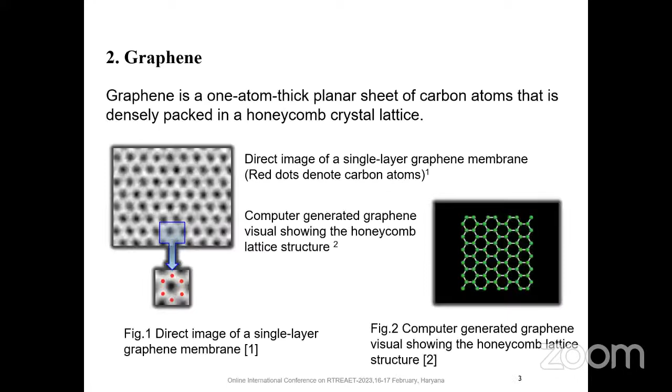In this research, what we have done is we have varied the channel length of the CNT in accordance with different channel lengths, and we calculated the drain current with the help of a tool freely available on Nano Hub. We compared that by decreasing the channel length, the current is also increasing.

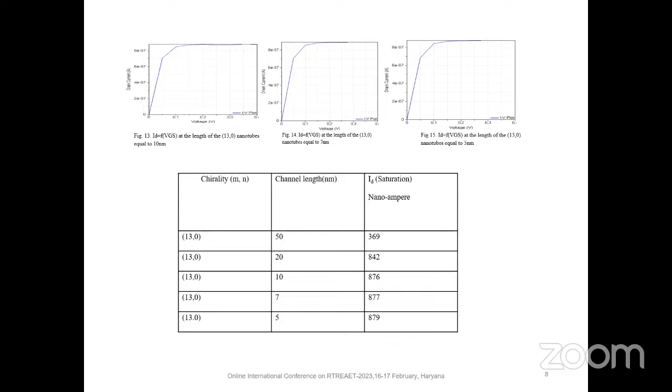From the table we can also plot the ID current, and we can see that as we decrease the channel length, the drain current also increases. So we can conclude that by decreasing the channel length, a higher value of current can be achieved, which can be used for realizing CNT FET circuits for higher drain current and high performance circuits.